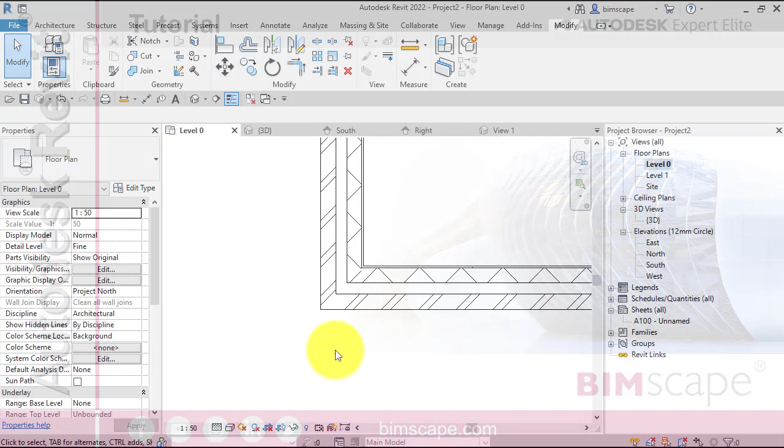In this Revit tutorial, I'm going to show you how to create a parametric brick pier to go on the corner of this external wall.

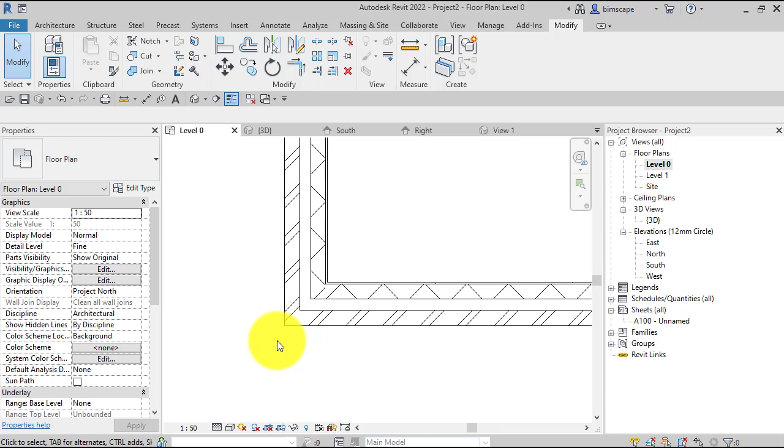This tutorial came about via a question posted on the BIMscape forums, where one of our members had this scenario where they had an external wall, and the detail they wanted was for the outer leaf, the brick leaf, to protrude past and form a pier or a buttress, to stand proud of the wall by about 100 mil to form this solid pilaster on the corner. They'd had a go at trying to form this detail in Revit and come to a dead end.

It wasn't working out. They've posted a couple of screenshots of what they attempted, and I'm going to show you those in a second, just to show you how far they got, and we'll describe some of the problems and why it didn't work out.

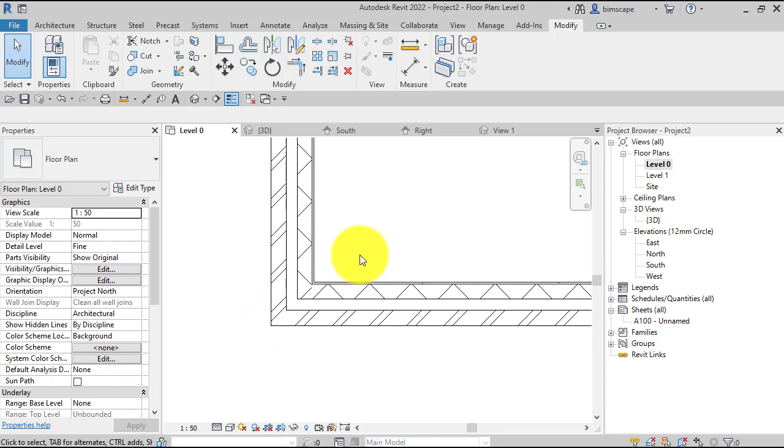Then I will describe my thought process as to possible solutions to achieve what they wanted, and then finally we'll go into the meat of the video, which is the tutorial on producing the parametric pilaster family.

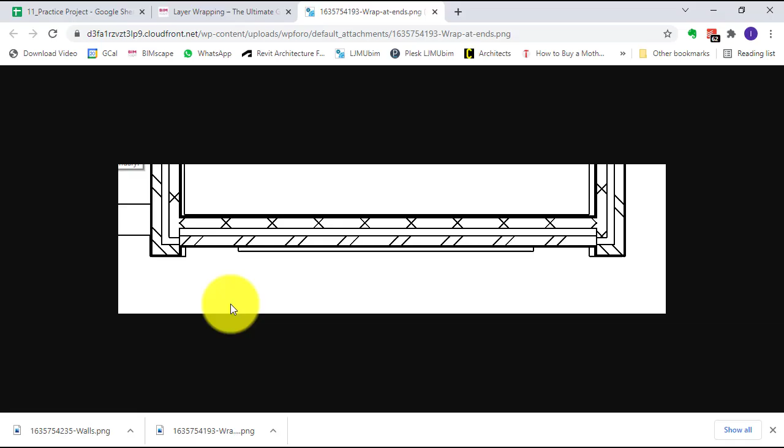So let's switch to the screenshots of their attempts to resolve it. Here is the first screenshot that they posted, so you can clearly see the external envelope, and they want these brick features, pilasters, however you want to term it, on the corners.

They'd formed different wall types here. They played around with the wrapping of the layers to try and get this to work out, but you can see as the wall protruded forward, it distorted the cavities. This no longer works - this leaf steps back here, and it's clearly not what they're after.

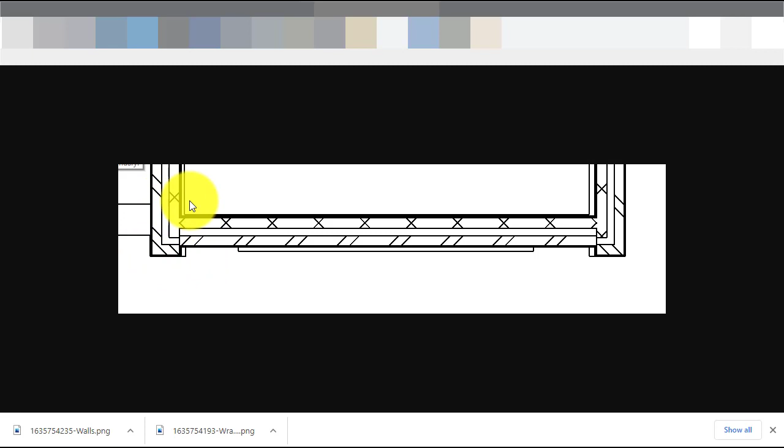So that was the first screenshot. Then they tried a different solution, a different strategy, and that resulted in this next screenshot. This one looks a little bit better than the last one, but it's clearly not correct. This layer, the inner leaf, doesn't wrap round. It looks like the plaster line comes through and the cavities don't join.

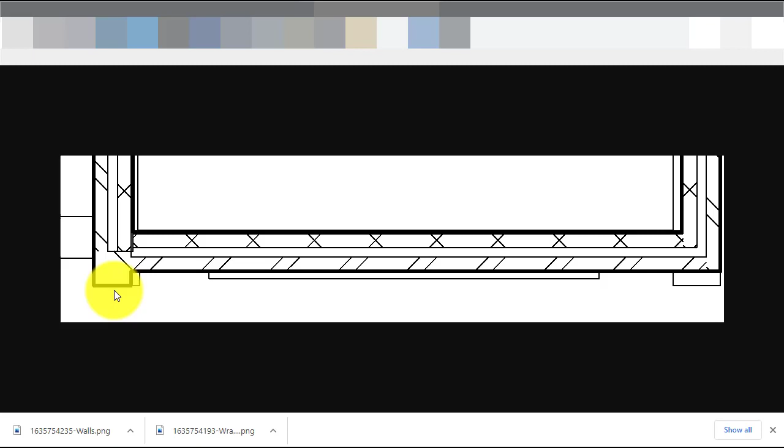So it just didn't work out, and I asked if I could take a look at it and make any suggestions. So that's when I fired up Revit, and I'll just switch back to it now.

Started a new project and just put in a couple of external walls just to mimic that corner. So we've got a brick outer leaf, a cavity, a block inner leaf, and a plaster layer.

So we want to form this brick protrusion at the front here. We want it the same width as the main wall, which I think is about 277 millimeters. We want it in solid brick, so the same material as this outer layer, and we want it to stand proud of the wall by about 100 mil. So the depth from the front of it back to the main wall is 100 mil.

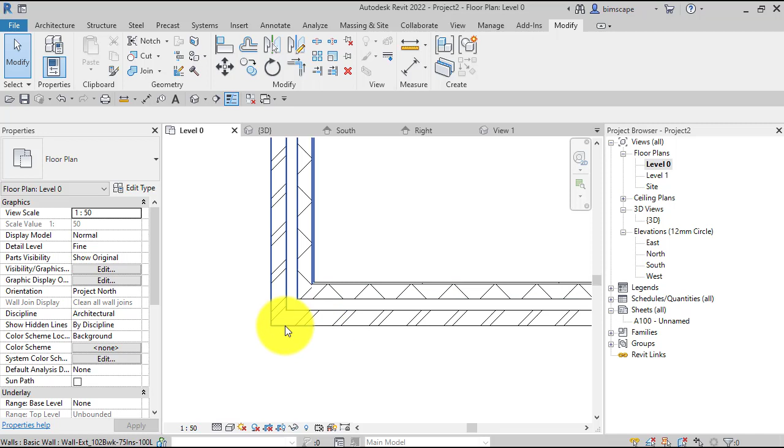So then I started looking at different solutions, because I just thought it would be interesting to see what different strategies in Revit would achieve the same thing, because quite often in Revit there are different ways of coming to the same outcome, but each with their own pros and cons.

So I myself played around with creating a different wall type, and I played around with the priorities of the layers. So if I just click into there, just to show you what I mean, if I edit the type, we go into the structure of this wall.

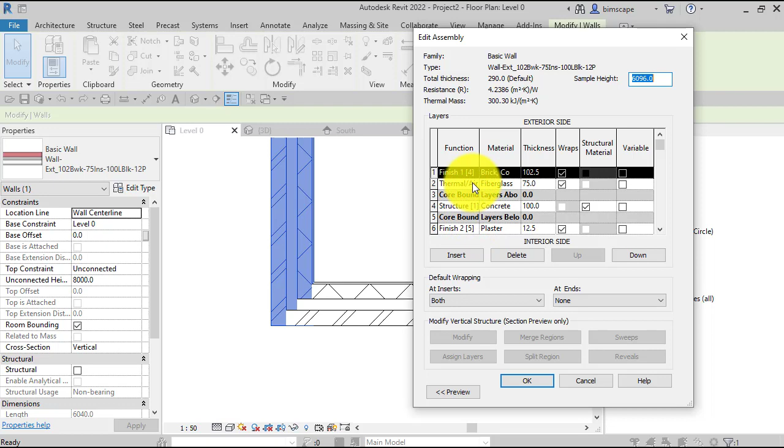You may be familiar with the first column there, the function layer, which basically, if you look in the square brackets, the numbers there are the priorities. So that determines, when you have two different wall types, how the different layers interface.

So the challenge here was to create a wall type just for the pier of a brick material, which only interfaced with the outer layer here. We didn't want anything to interfere with the cavities.

Now the problem is, in any wall type in Revit, the minimum you need in terms of layers is just one layer, but that has to reside in the core zone. Now the core zone typically is in the middle of the wall.

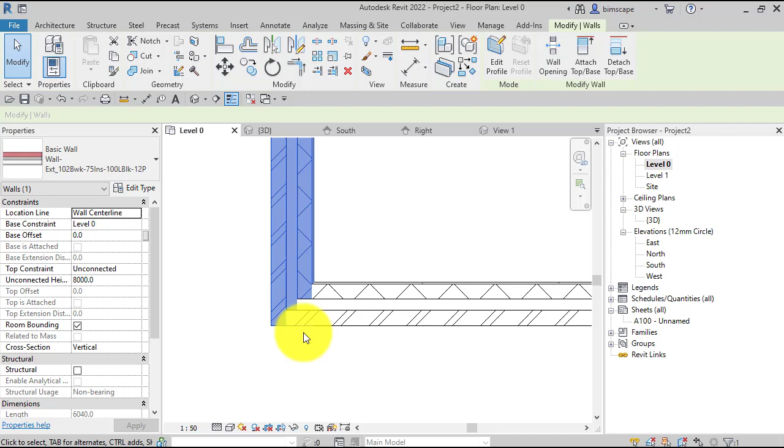So when we create our new wall type for the pier and put our brick layer in, it has to be in the core zone, so it started to want to interface more in the middle of the wall. We just wanted it to butt onto the outside there. I played around with that to different degrees of success, but it seemed an overly complicated and convoluted, slightly hit and miss process.

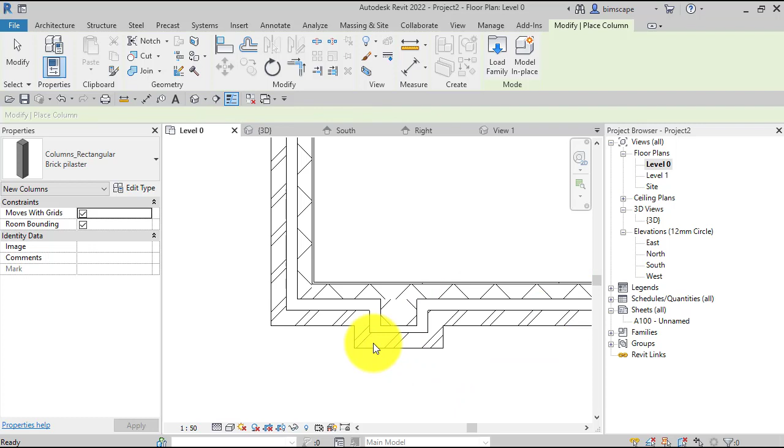I then considered architectural columns. A property of an architectural column, as opposed to a structural column, is that they will embed automatically into walls. But again, although we had a solid monolithic column, it distorts the structure of the wall and brings the cavity round. We just wanted this to go through - albeit that wasn't on the corner, but it'd be the same effect. So again, not ideal.

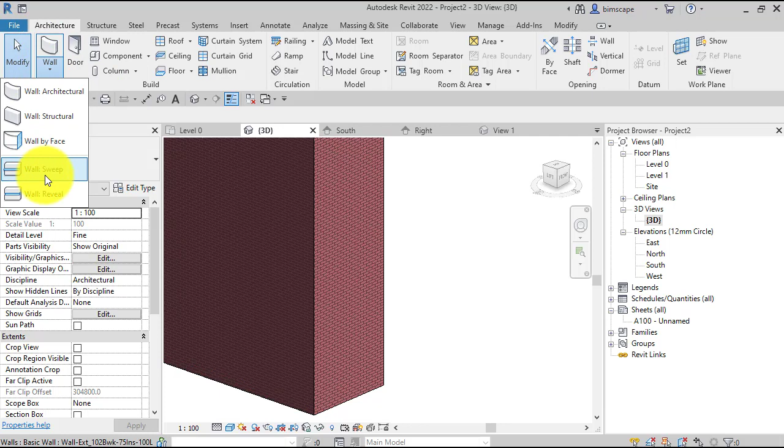So I then thought, well, how else could we achieve this? I thought about possibly using a vertical wall sweep. Under walls we've got sweep, and you can use those in the vertical orientation, so we could apply that. I could move that over to the corner, but again you can see the problem here - the hatch pattern goes the wrong way.

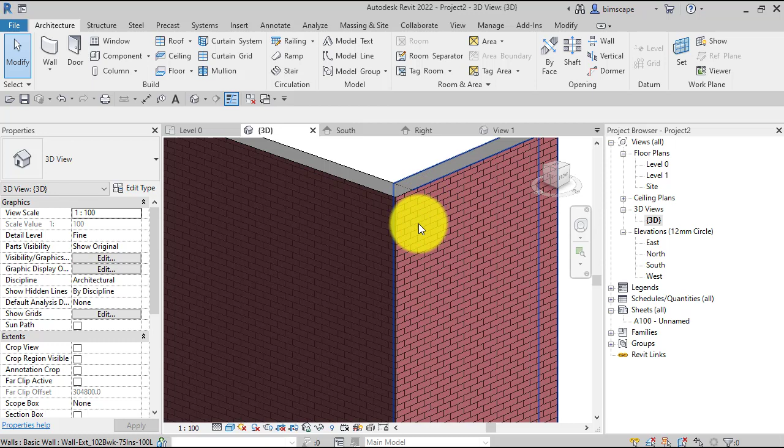Now yes, we could duplicate the brick pattern, make a second version of it and turn it through 90 degrees, but it just starts to get really convoluted for what should be quite a simple strategy or solution. So I dismissed that one, and it brought me to the fact of why not simply create a parametric pier as a family, a component family that we can just host onto the wall. We can type in the dimensions we want for it and the height, and reuse it. So that's where I arrived in terms of a strategy, which is what I'm now going to show you how to do.

So if I go back to a plan view, it's going to be a family, so we're going to play around in the family editor. If you're interested in more information about creating your own families in Revit, we have different articles, tutorials on the website, and a full course on creating Revit families.

So we've got file, new family. Now one of the main things when you create a family in Revit is choosing the correct template for the job. We're going to go with a metric generic model. We're going to make it wall based so that it automatically snaps to the wall or is hosted on the wall - that's the template I'm going to choose. Hit open, the family editor opens. The interface changes for all the family editing and creation tools.

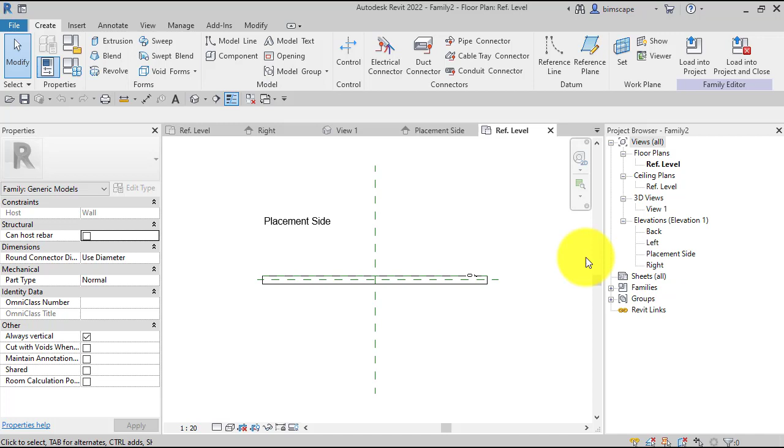So we've got a sample piece of wall, and that's because we chose a wall based template. It tells us which side is the placement side, so this will be where we'll create our pier. Before we do, we're going to just set up a simple framework in which we can host the sketch lines for the extrusion. So I'm going to create a reference plane.

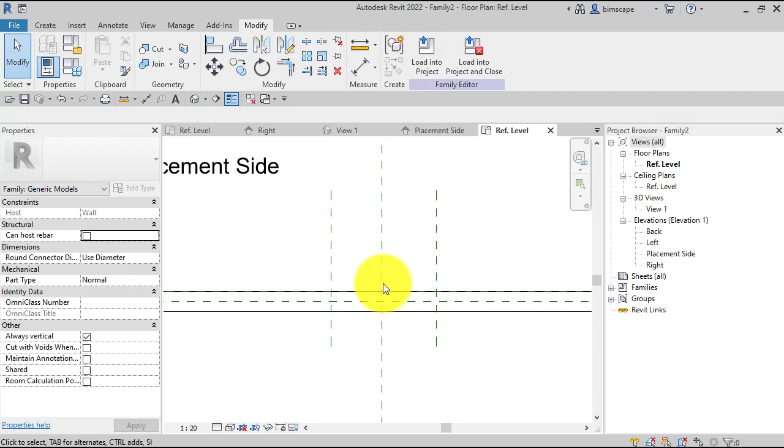I'm going to do this fairly quickly - you can watch this video again a few times if you want to follow along with what I'm doing, but I'm basically just setting up a framework, a skeleton of the footprint of our pier, and I'm doing that in reference planes.

Now we could just create this pier as a fixed size, fixed dimensions - the person asking the question presumably had an idea in terms of its width and depth. But my logic is, if we go into the trouble of making a component family, we might as well spend a couple of minutes extra and make it parametric, so that we can reuse this family in different projects or in the same project with different sizes, all for the sake of just adding a couple of parameters.

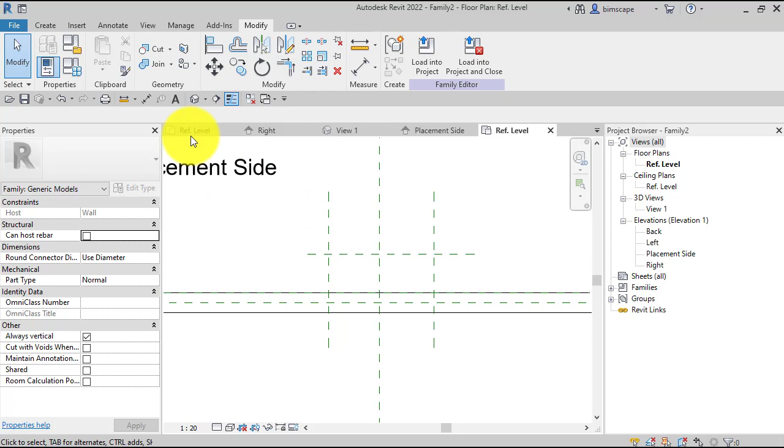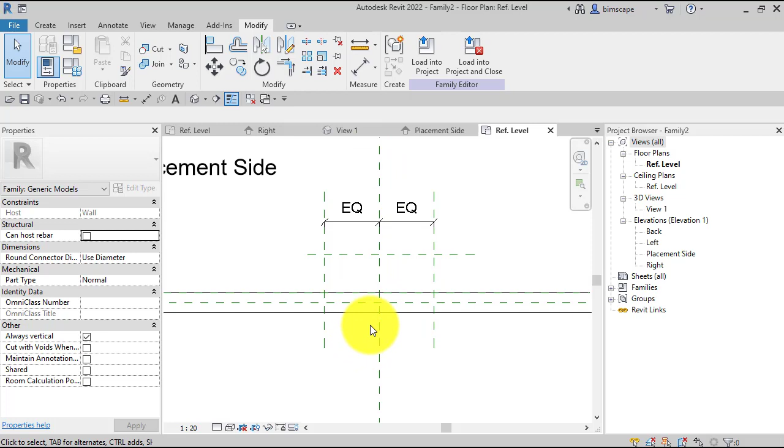So I'm going to dimension this now. Put a line dimension there, and I'm going to make those equal. The purpose of this dimension I've just put in is to make sure that when one of these reference planes moves, the other one does - they always stay equal around the center point of this central reference plane. So I'm now going to put an overall aligned dimension, which is the one I'll use to control that width.

So we select that. Now if we look up on the menu for label, there's no parameter or property at the moment, so I'm going to create one. I'll call it width, and make it an instance parameter so we can change it for each pier if needed. They can be different in the same project. So it's going to be length, that's fine, it's picked up all that.

I won't complicate this tutorial with shared parameters. If I was doing this for real for myself, I would use shared parameters so we can extract this parametric information into a series of tags or schedules within the project. But for now, for simplicity, I'm going to leave them as family parameters, so they will just be available in the properties for that family when it's selected.

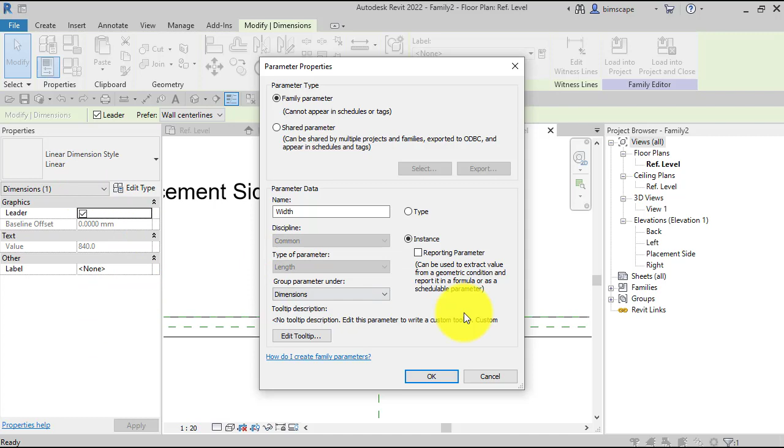So hit OK. So the label appears there with the current value, width 840. We are going to now create another align dimension.

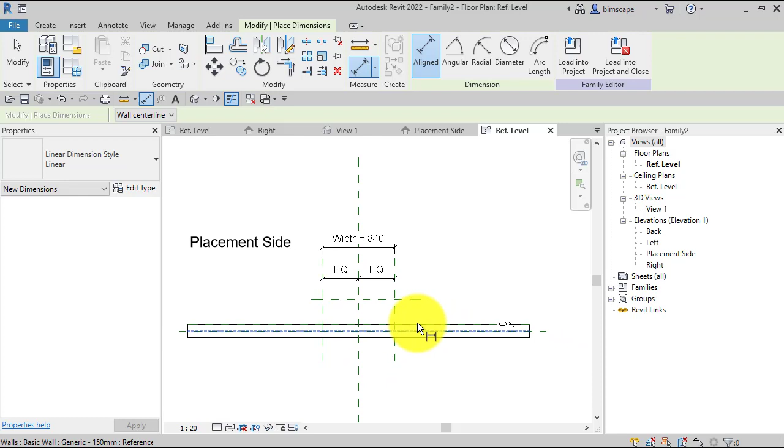Now it's crucial that we dimension to the reference plane. There is a reference plane that came in with the family template on the face of the wall. The purpose of that is, obviously, when you're using this family in your own projects, this wall could be any thickness. We've just got a sample piece of wall of a set thickness that came in with this template, but there's nothing to say the wall you're going to use this component on might be twice the thickness. So in order that your component doesn't end up buried in the wall because it's based on a finite thickness of wall, it has this reference plane that represents the leading edge or front face of the wall.

So we need to make sure we dimension to that reference plane. If I use the tab key, I've got that now, you can see it's highlighted. Select that there. Select the front reference plane.

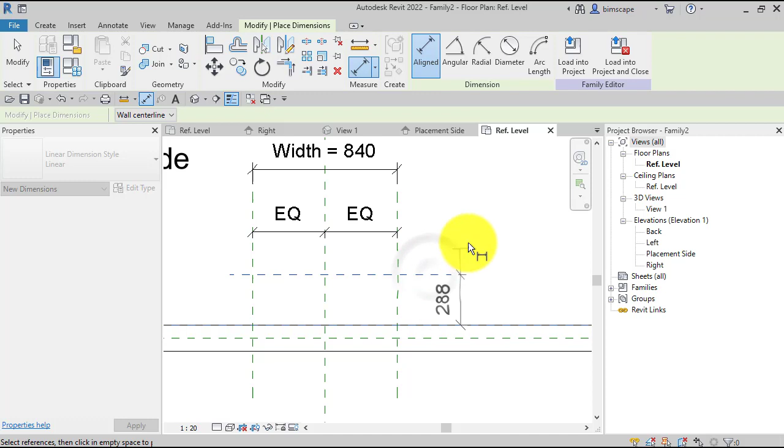We need to convert that to a label, need to create a label. I'm going to call that depth. It's going to be an instance parameter again. Hit OK.

So we've got two parameters now that when we use or load this component into a project, we can vary, and you're used to the properties palette. So when you select a door or window, for example, you've seen all the key dimensions. Well, that's what will happen here. Now we've set these up, these will appear when we select the object, and we can just type in the values there in the project that we want our pier to be.

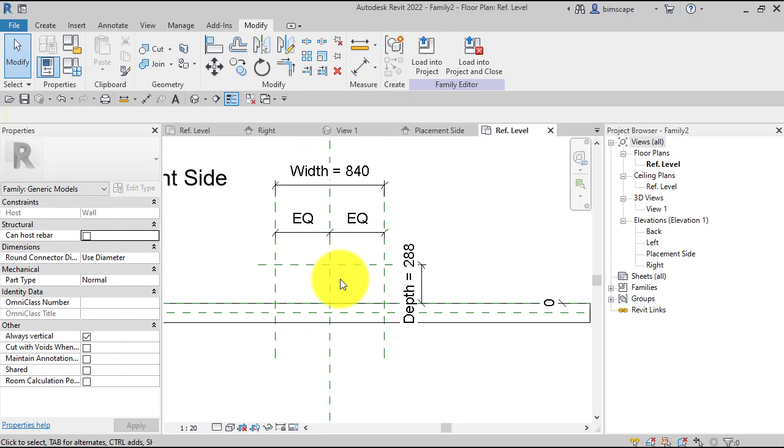So the final thing we're going to do before we actually create the geometry is create another reference plane and a dimension to represent the height of it. So again, we can vary the height we want this column or pier to go up to when it's placed against a wall. So I'm now going to look from an elevation view.

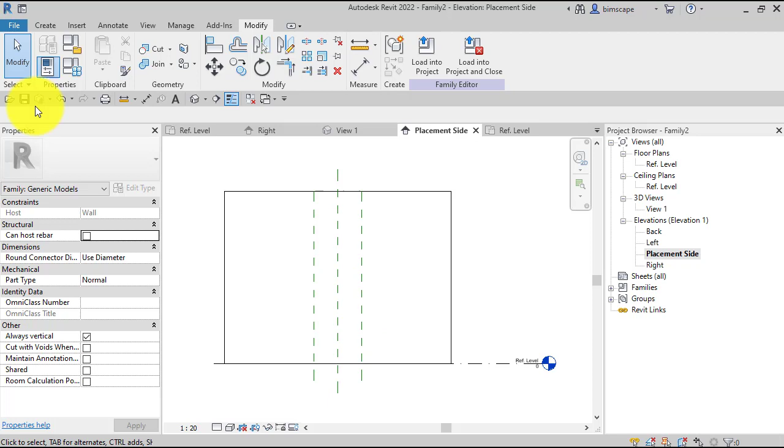I'm going to create a reference plane. This is going to represent the top of the column or the pier. So I am now going to form a third align dimension from the reference plane, that's always going to represent the base of the column up to the top one there.

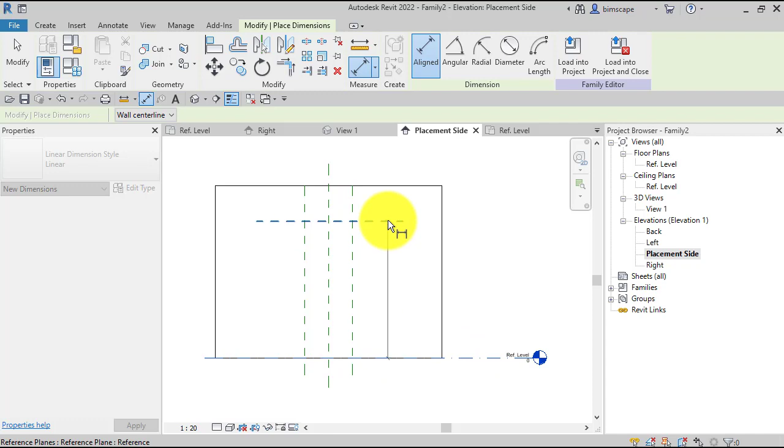Again, select the dimension we've just created. I need to create a new parameter for it. I'm going to call that height. And this certainly does need to be an instance parameter, because we might have these different piers around our building in the same project, and some might need to, for example, reach up two stories, some might be single story, etc. So that's the only way we're going to be able to vary between the same component, is making them an instance parameter rather than a type one. Hit OK.

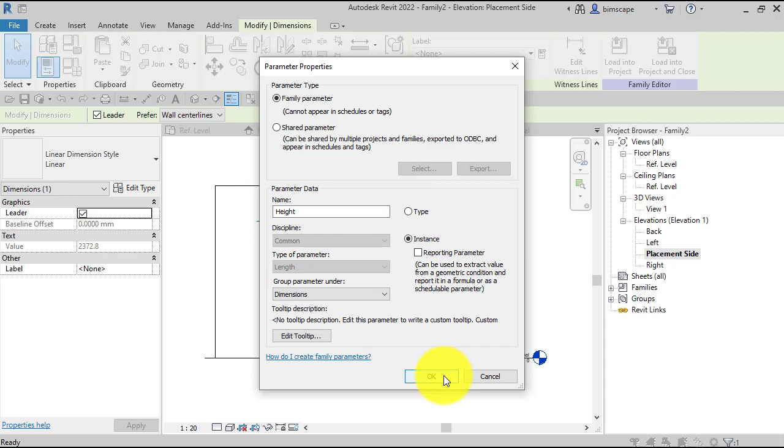Right, so we've got a framework all set up. We're now going to just create the geometry. So create, it's going to be a simple extrusion.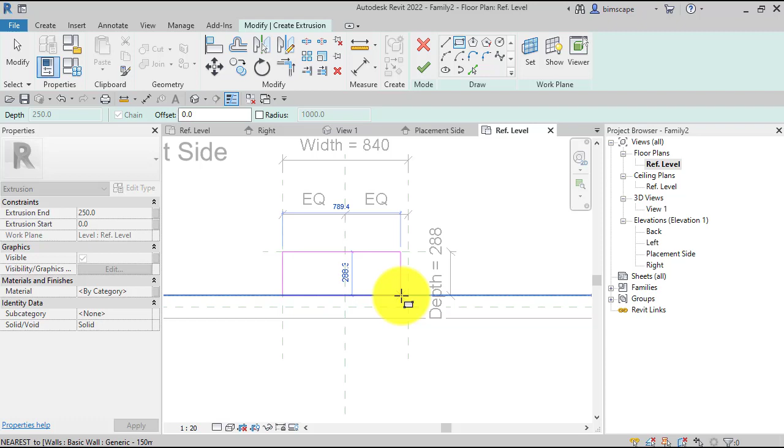Goes into sketch mode. I can use a rectangle tool. All I'm doing is defining the footprint for our extrusion in these pink lines.

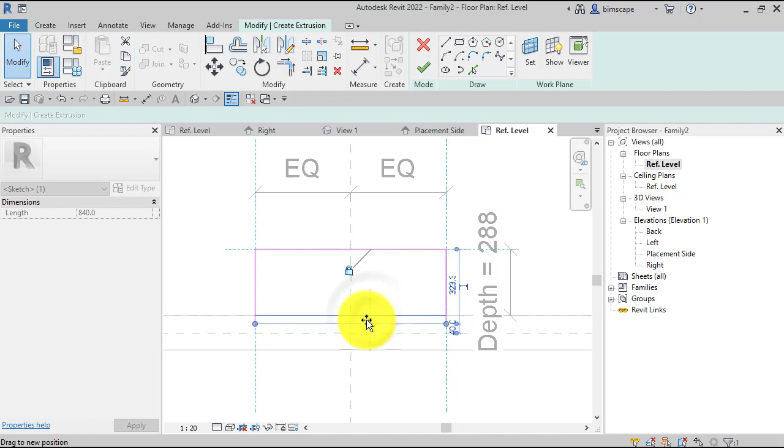Now the crucial part here is to make sure that each of these 4 lines is locked to the reference planes. The reason you're going to do that is because when you use this component in a project and vary those parameters we just set, this depth and this width, Revit will make these reference planes go closer together or wider apart as the dimension changes, and you want these sketch lines for the extrusion to stick to them.

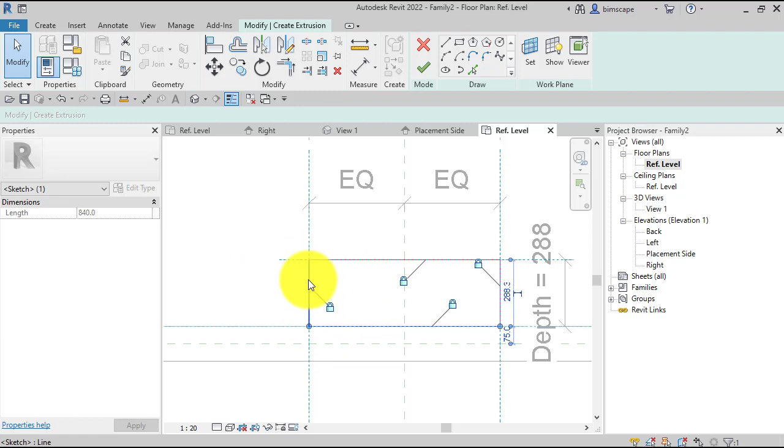That's why we're putting these constraints on. Otherwise, what would happen is the reference planes would move apart when you change the dimensions, but there would be no change to the position of where these sketch lines are. Basically, the extrusion would just stay the same size because it has no reason to change shape. We've locked it and said when these move, these sketch lines follow it.

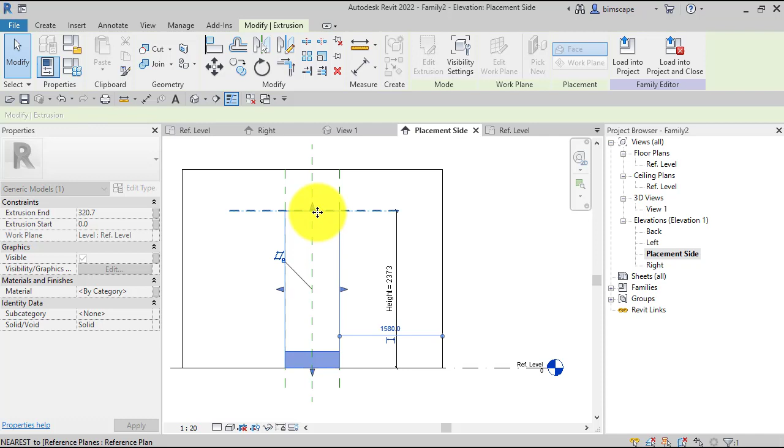So we've done that there. Okay, that forms extrusion. We can't really see it because we're looking in plan, so let's look from the placement side. There's the extrusion, it's quite short at the moment. So if we drag that up and again constrain it to the horizontal reference plane we created.

So again, in your project, you can see how this is going to work now. You'll load this component in, you'll want to change the height. You'll select the component, this height parameter will be listed over in your properties palette. You'll put a different value in, which will cause Revit to raise or lower this reference plane.

And now, because we locked or constrained the top of the extrusion to that reference plane, then the extrusion will rise or fall accordingly. So basically the pier gets taller or shorter.

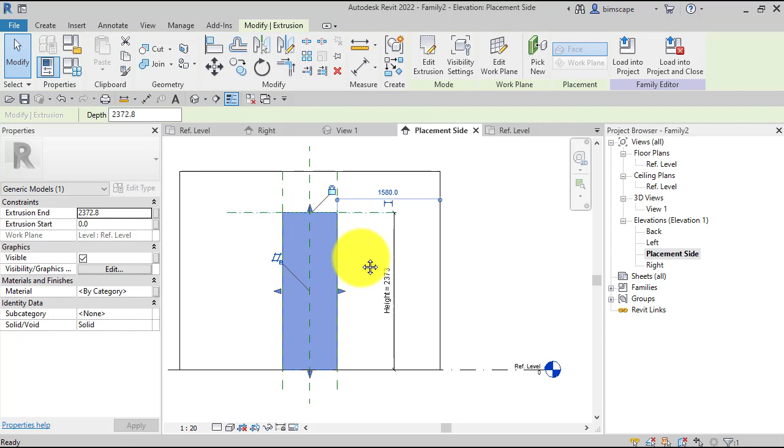So far so good, let's just have a quick look in 3D. And there's our pier. We don't need to worry about the dimensions now because we made it parametric, we can just set those once we load it into the project.

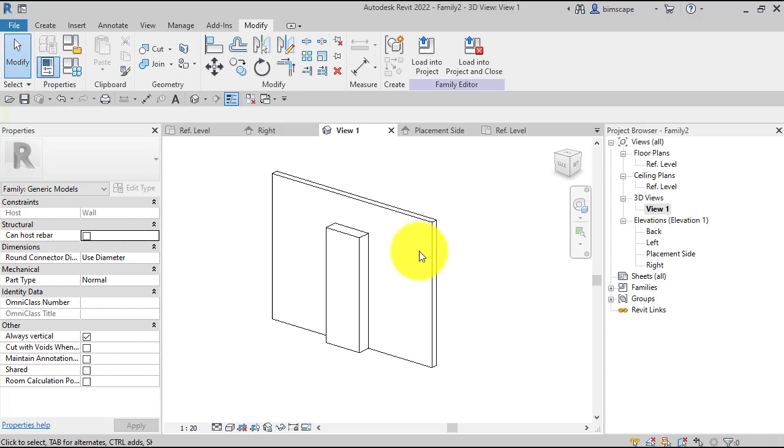The final thing we need to do before we start using it is actually just set a material to it, because we want that brick material on our pier so that it matches in with the brick walls we're going to use it with. So we can simply select the geometry that we've created, the extrusion.

Material, it's not set at the moment, it's just by category. So I'm going to click on that, hit the button with the three little dots to bring up the materials browser. You can see a very limited palette of materials that come in with this template.

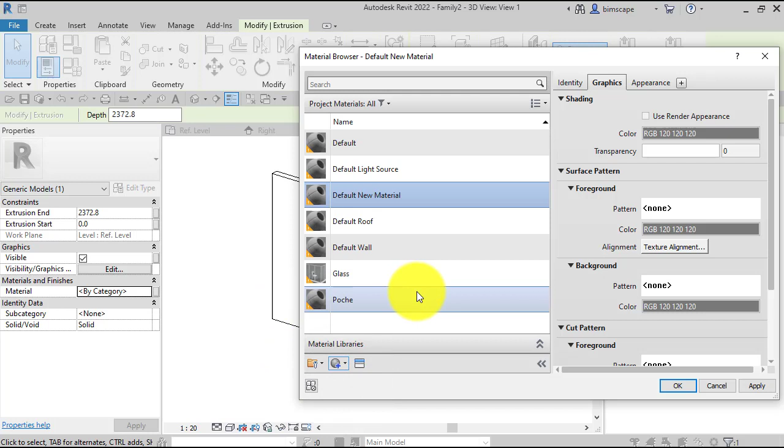So what we need to do is create a new material, and as long as we name it the same as the material that we want to match in the project, Revit will handle that. We don't have to create the material in its entirety in the family editor now, i.e. with all the hatch patterns and the graphics and the colors. We just create a blank material, but as long as it has the same name - in this case the one we're after is called Brick Common - then when we load the component into a project that has that material in, it will cross-reference it and apply that material to our component.

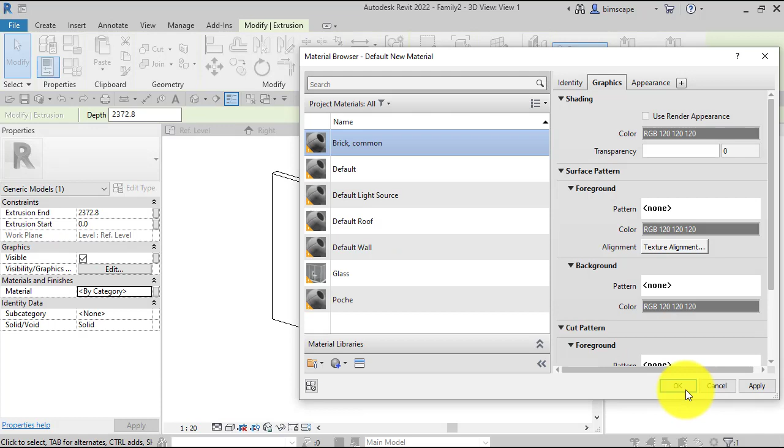So I'm going to rename this Brick Common. Okay, that - right, we're ready to try this out.

So if I load into project... okay, and there it is.

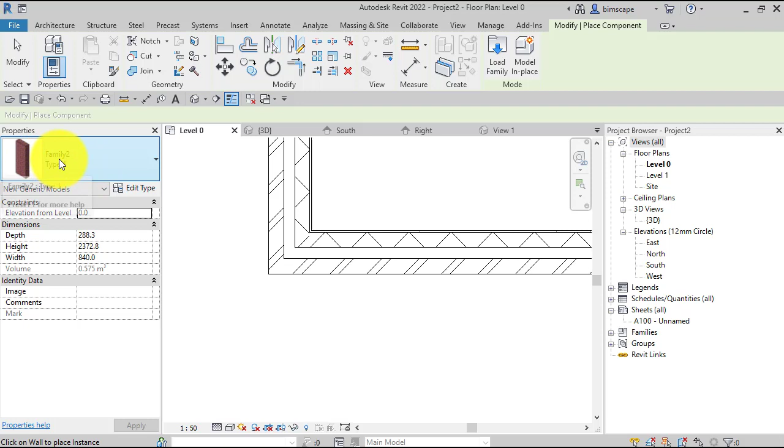Now again, if we were doing this for real, we would save this obviously somewhere safe, and give it a proper descriptive name. We might even set up some standard types for different sizes, standard sizes, but for the purpose of this tutorial, we just want to show you the principles of how we create this and then use it. So it is wall based because that's the template we chose.

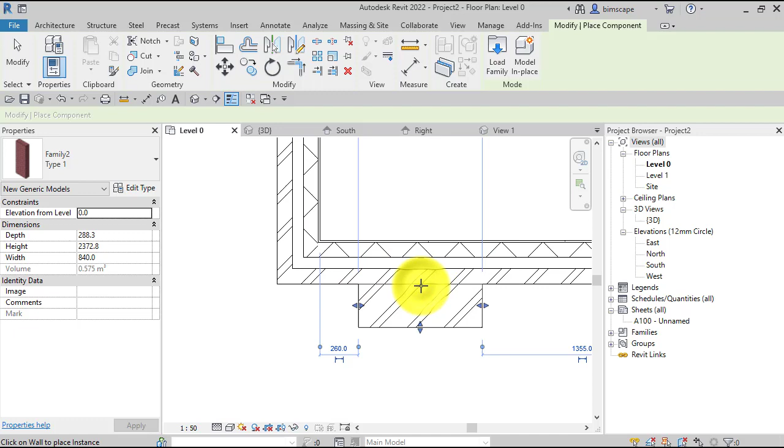So you can see we get the no entry sign unless we go near a wall, and there we have it. Click on there and it places it. Now let's select the component.

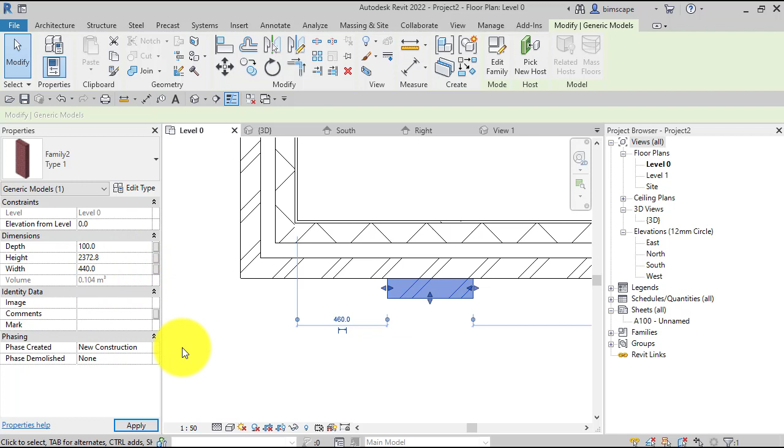There are our parameters that we set, our instance parameters. So we wanted, I think it was 100 by... let's say 440, something like that. Now we can just use the move tool to bring that over.

Stick it on the corner. Let's take a look in 3D.

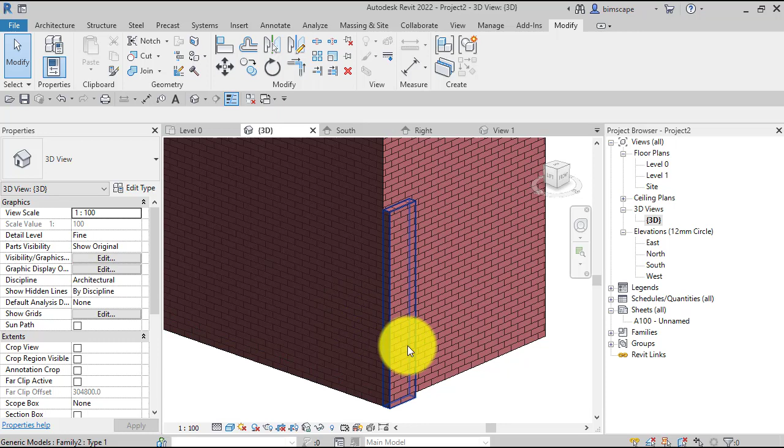There we are. Now the final thing, just to tidy up so it's more integral with the wall, both in elevation, because you can see we've got a line down there, and certainly in plan you'll have noticed that line.

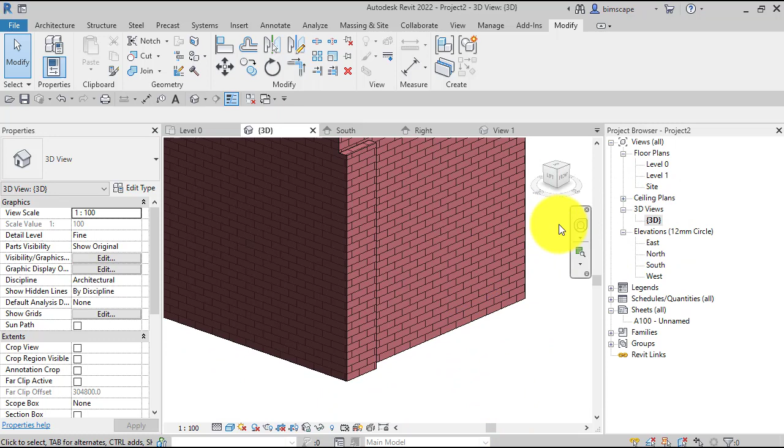We just simply use the join geometry tool, select that, select the other wall, and there is our completed pier. Just check this out again in 3D, and we have a pier or a column at the corner, all displayed correctly and in plan.

Now one final thing just before I finish, if you followed along and your hatch pattern has not come out as neat as that, it's probably because that particular drafting hatch pattern is set to be aligned to the elements rather than the view. So I will change it back to that and then show you how to adjust it.

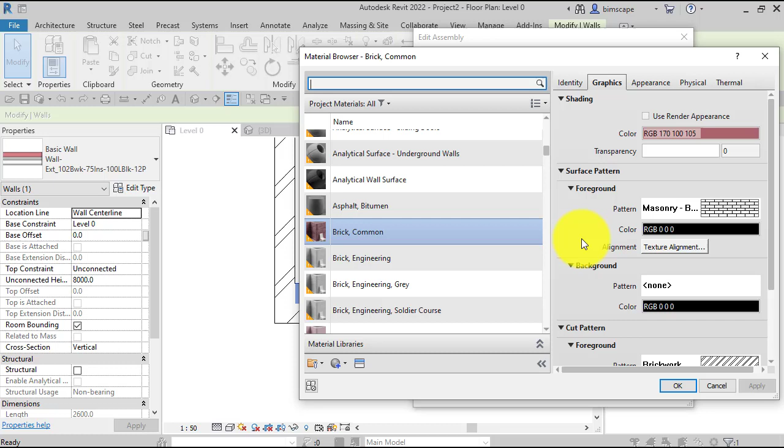So if I select the wall, what we need to do is just drill down and find that material. I'm just going to go into the structure. It's the brick common there. Select it. Now it's actually the hatch pattern where it's cut that's causing a problem.

It's this one here, pattern's called brickwork. So this is an attribute within the overall material. I click on brickwork. There's the brickwork drafting hatch pattern.

If I edit that, now right down here at the bottom, so you can see how far we've had to drill down to find this, there is a parameter there called orientation in host layers. So it's orientated to the view at the moment.

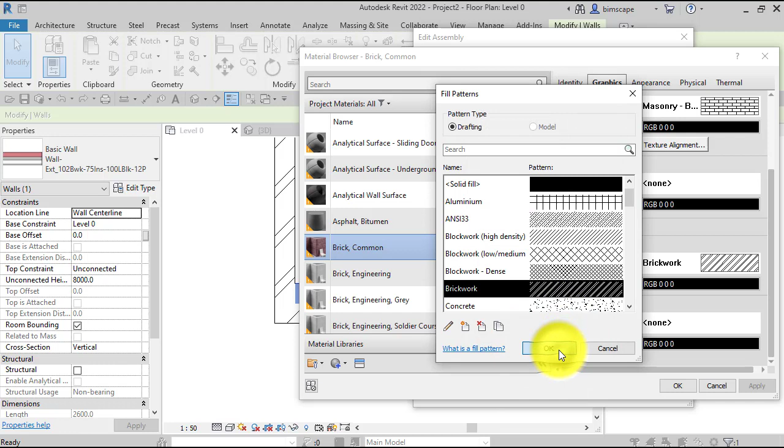If I put align with element, which is the default normally, so that could be why you're seeing it not as neat as this example. Let's just go all the way back, apply that. You may be seeing something like that.

So what's basically happening now is for each individual element, i.e. that piece of wall, then this piece of wall, and now the pier, it's aligning or starting the alignment afresh each time with the pattern on each individual element. So there's no uniform synchronization of the pattern across elements. Each element is treated in isolation in terms of how Revit is putting the pattern on. You can see there it neatly finishes, or not neatly as the case may be, and the same there.

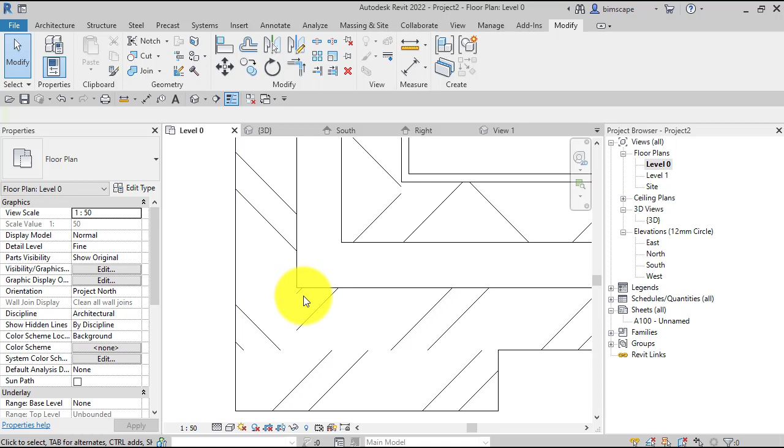What you want to do, I would suggest, to get a much more satisfying result with your hatch pattern, is you just want the pattern across the whole view, so it runs across the elements. So for those of you old enough to remember pen and ink drafting, you'd get your set square and put your lines across there like that. So that's what you want to reproduce in Revit.

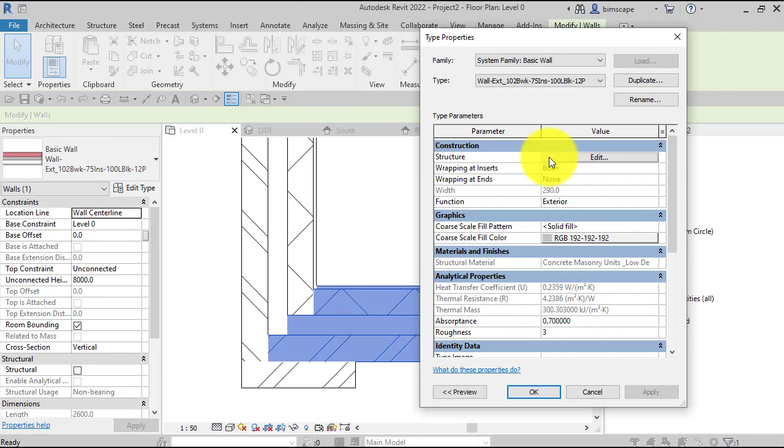So let's just go and find that material again. Edit type. I could just go to the materials browser, but I'm just using this method of drilling down to get to it. So brick common, hit the three buttons.

There it is, brickwork pattern. Click on that, there it's highlighted. Edit it. Right down at the bottom, align with element.

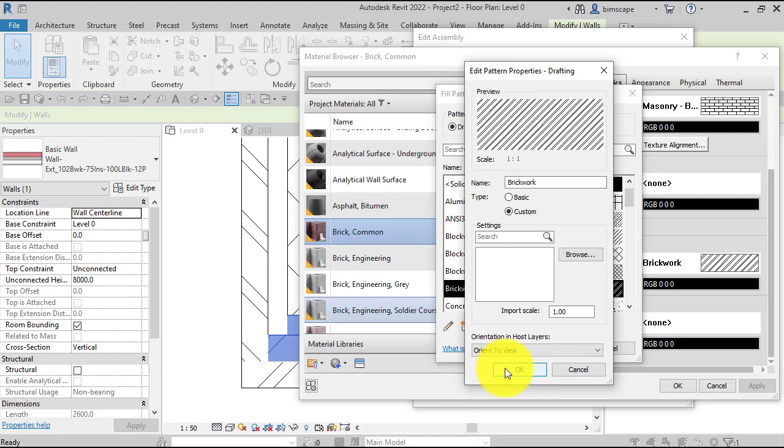So we've seen that that's not really particularly successful. Swap it to orient to view, so it just takes the view as a whole and applies it across all the layers. Hit okay, and okay again, and one more, and in fact one more, and we're back out, and it's changed the drafting hatch pattern, and that looks a lot neater.

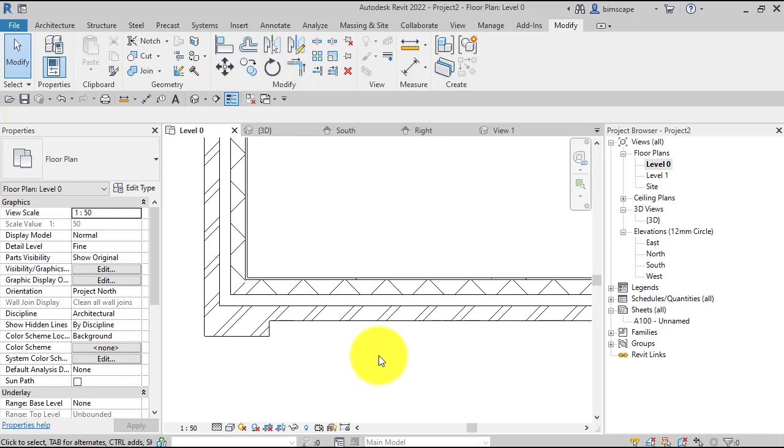And because we made our parameters for our family as instance parameters, we can now go and put any number of the same family but with different sizes and different dimensions, because they were instance parameters rather than type parameters. Just gives us an extra degree of flexibility.

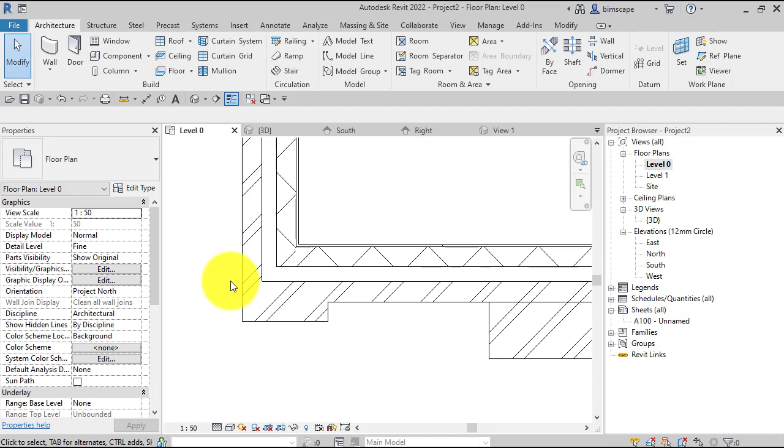So hopefully this has been of interest and of use to you, and it should be hopefully a good example of why it's a good idea to start experimenting with the family editor environment in Revit, because there will always be things like this. Could be to do with walls, roofs, 101 things where you want some specific detail and the out-of-the-box tools don't quite work, or they're too convoluted.

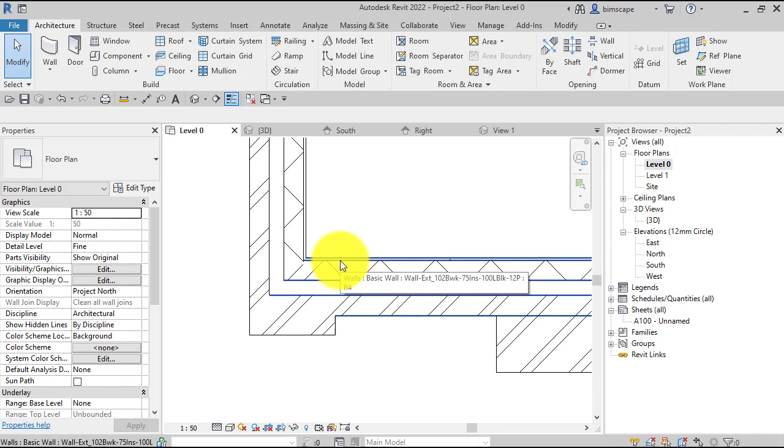Maybe you can't find any ready-made components that easily. So with a few simple concepts under your belt in a family editor, you can quickly produce these parametric components that sort the short-term requirement, but also can be reused in future projects.